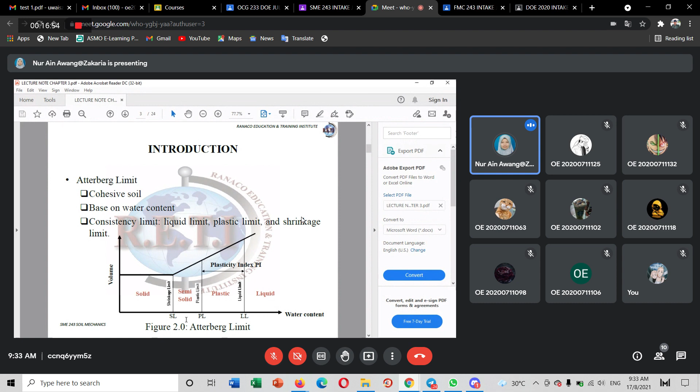So, it along with the plastic limit provides a means of soil classification as well as determining properties. As long as we know the plastic limit we find, it's for classification of soil, which we use to know its properties.

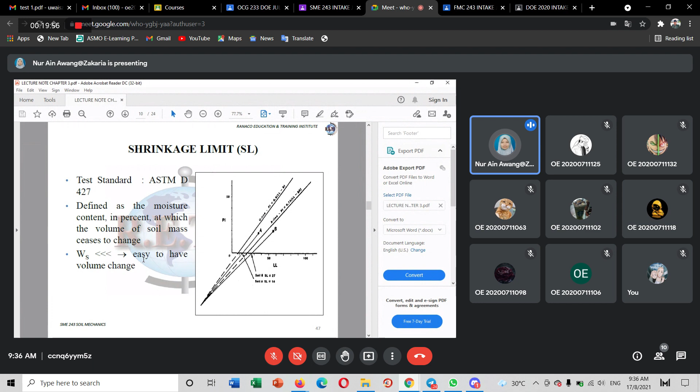Okay, salah kita. Next.

Consistency relation. Daripada tadi kita cari SL, PL, LL. So sekarang kita boleh tahu plasticity index, PI equal to LL minus PL. Dan tadi dah jumpa kan? Untuk cari liquidity index pula, LI equal to water content minus PL divided by LL minus PL.

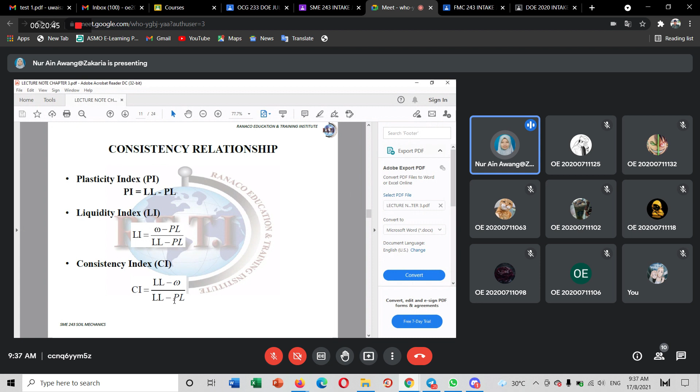Okay, ni adalah relation lagi, consistency relation lagi, yang mana kita describe pasal activity A. Activity A ni kita call sebagai satu benda yang kita nak tengok relationship dia. Kalau tengok pada sini, the value ni adalah value of A, less than 0.75.

0.75 maksudnya kalau macam sini kan, ni aktiviti 0.5, 1.0, 2.0, dia adalah non-active clay. Kalau activity A in between 0.75 to 1.25, dia adalah normal clay. A greater than 1.25, dia adalah active clay.

Nanti kita akan describe lah, kalau contoh dia duduk kat sini, macam mana? Dia di bawah 0.5, maksudnya kawasan dia adalah 0.5, less than, so dia non-active clay. Kalau dia in between 0.75 sini, 1.25 sikit, dia adalah normal clay. Kalau dia lagi besar daripada 1.25, maksudnya besar kawasan sini, dia adalah active clay. Tapi nanti saya akan bila tak ada dia pun, insyaAllah.

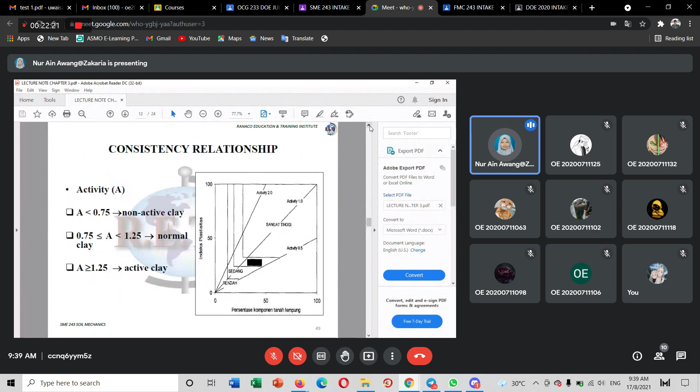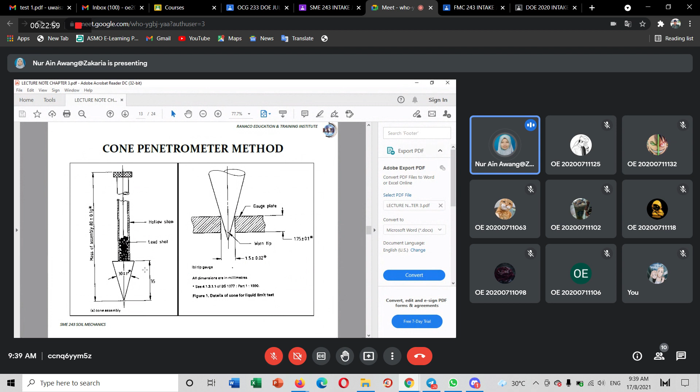Dia ada panjang macam ni, lepas tu dia ada cone macam ni, lepas tu dia ada hollow stem, dia ada lead shot, and then dia akan saya tunjuk awak. Ini method dia, penetration method. Kita akan go through how dia punya preparation.

Okay, so untuk sample preparation, kita first, kalau any coarse particle present need to be removed. Kita ambil soil, kita ambil sampel. Tapi untuk yang kasar-kasar, biji yang besar-besar, soil kita buang, by hand ataupun kita guna wet sieving. Kita buang dengan tangan ataupun kita sievingkan kasar-kasar lah.

Apa maksud coarse particle ni? Yang mana dia adalah yang retain dekat 425 micron sieve. Maksudnya kalau yang melepas ni kita ambil, yang tinggal itulah coarse particle. Faham tak? Okay, kalau kita sieving dia kan.

Okay, untuk next, preparation sample is quite big. Kita ambil yang kita dah sieve tu, yang lepas pada 425 micron sieve tu, kita ambil timbang dapatkan dalam 200 gram. Then the sample is transferred to a flat glass plate. Sample yang 200 gram tu kita transfer pada glass plate.

Okay, mesti awak tak nampak sebab tak pernah buat, tapi tak apa, nanti saya share video. Distilled water is added and the soil and water are mixed thoroughly.

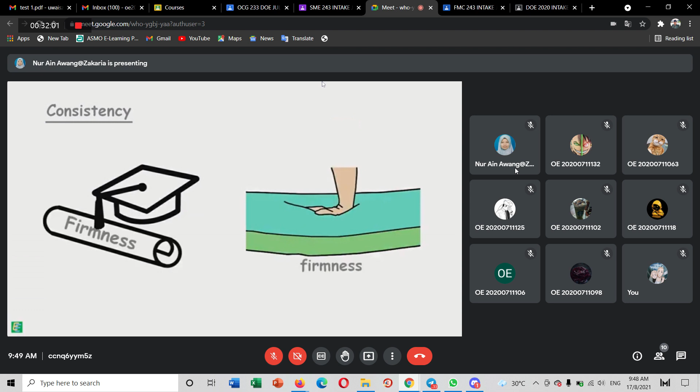We have learned that consistency is a term which is used to describe the degree of firmness of soil, and consistency limits are water content of soil at which the soil changes from one state to other. Those different states of soil are liquid state, plastic state, semi-solid state, and solid state. And consistency limits are liquid limit, plastic limit, and shrinkage limit.

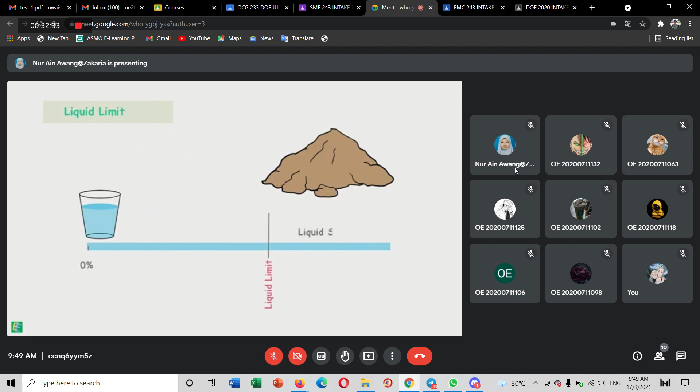We learned liquid limit as the water content of the soil at which it changes its state from being liquid to plastic and stops flowing like a liquid. At that point, shearing strength of the soil is the smallest value that can be measured in the laboratory.

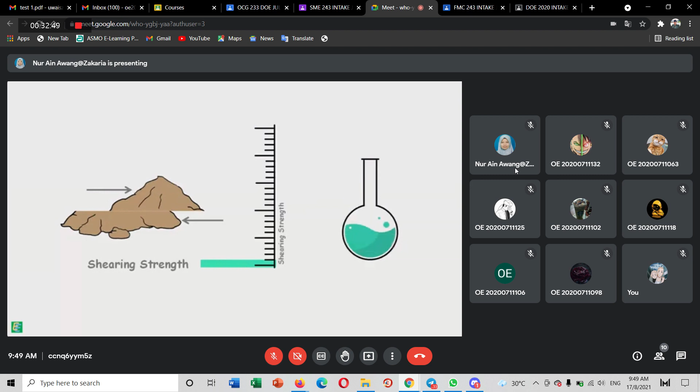The liquid limit of the soil depends upon the clay minerals present in it. Some clay minerals have larger surface area, and clay particles have negatively charged surface. So greater the surface area, stronger the surface charge, and greater will be the amount of adsorbed water. Therefore, higher will be the liquid limit.

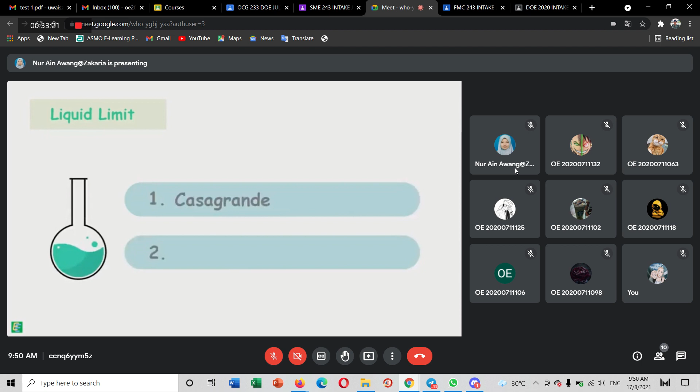We can determine liquid limit by two laboratory methods: Casagrande method and cone penetration method. We have already discussed the Casagrande method, and in this video we will discuss the cone penetration method.

In this method, we make use of an apparatus named cone penetrometer. It consists of a stainless steel cone which has its apex angle of 30 degrees. This cone has a length of 35 mm. It is attached to the base of a steel plunger rod. Weight of this assembly is 80 grams.

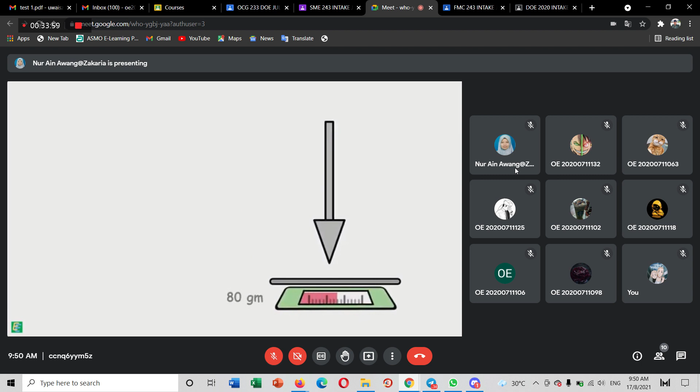This arrangement can slide vertically on pressing a push button, and is fixed to a stand with a base by a clamping screw. There is also a graduated scale attached to the instrument to take the readings of the amount of cone penetration.

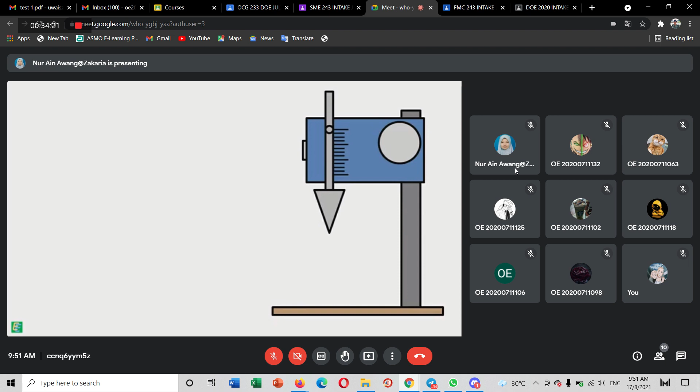In this test, the liquid limit is correlated to the penetration of a freely falling calibrated cone into the wet soil mass.

The soil sample is prepared in the similar manner as we did for the Casagrande method. The soil sample to be used for the test is air dried, pulverized, and passed through 425 micron IS sieve, because Atterberg limits are only significant for fine grained soils.

The 425 micron IS sieve has mesh openings of 425 micron or 0.425 mm. The particles we get after sieving are all of size less than 0.425 mm. These particles include fine sand, silts, and clays.

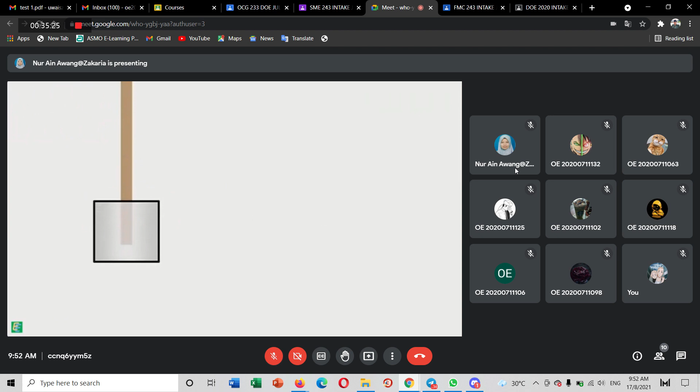We take about 150 grams of this sieved soil in an evaporating dish and thoroughly mix distilled water to form a uniform paste. Enough soil is placed in the brass cup of 50 mm internal diameter and 50 mm height. We need to ensure no air is entrapped in the cup.

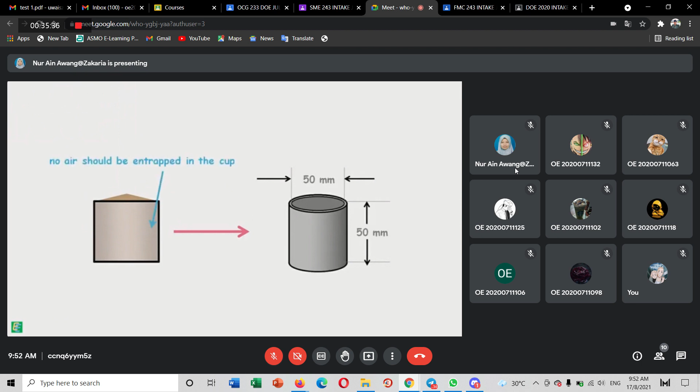The surface of the soil is leveled and the cup is placed below the cone. The cone is gradually lowered so as to just touch the surface of the soil in the cup. On the graduated scale, the reading is noted as the initial reading.

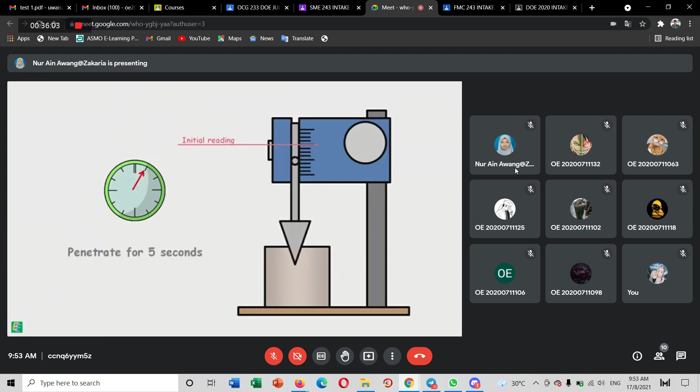Then we start the timer and the push button is pressed to release the cone. The cone is allowed to penetrate the soil for 5 seconds. After 5 seconds, the reading on the graduated scale is noted down as the final reading.

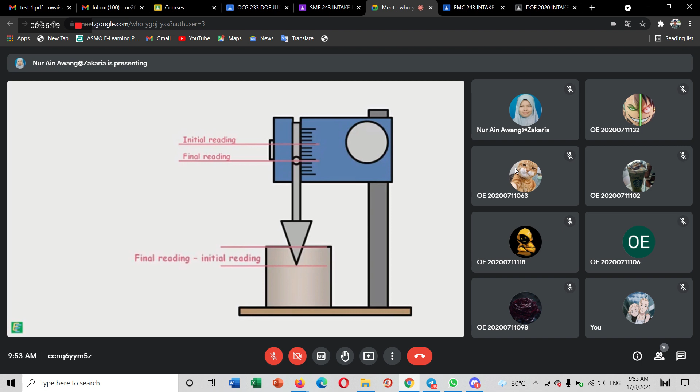The depth up to which the cone has penetrated the soil sample can be known by the difference of the initial and final reading of the scale. The penetration is noted down to the nearest millimeter. Let's say this penetration is P1 mm.

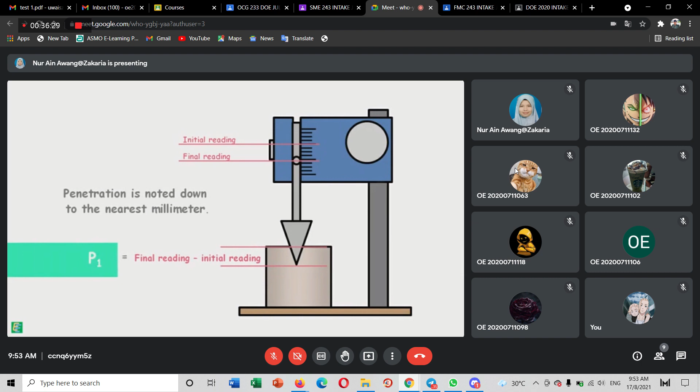Some amount of soil is taken from the top of the cup and its water content is determined using any of the water content determination methods. Say the determined water content is W1.

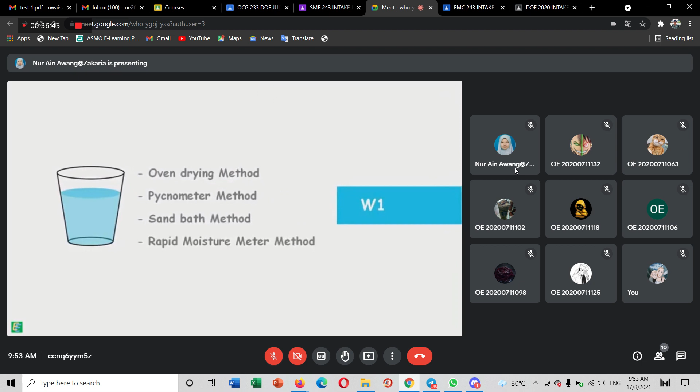Liquid limit of a particular soil is defined as the water content at which the cone penetrates the soil up to 20 mm in 5 seconds. But since it is difficult to have such a water content of soil which gets us exactly 20 mm of penetration in 5 seconds, we repeat the whole procedure at least 3 more times with different water contents.

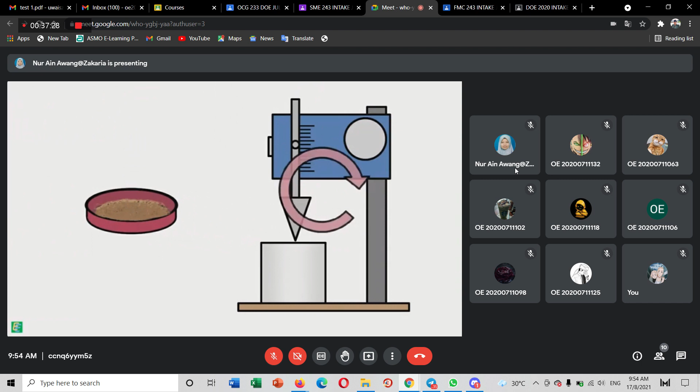The remaining soil in the cup is removed and mixed in the dish again. The cup and the cone are cleaned. Now we add more water to the soil and again make a uniform paste. Then we repeat the experiment and the values of penetration and their corresponding water contents are determined.

Soil with low water content would yield a lesser penetration value as the soil paste will be stiffer, and soil with high water content would yield a higher penetration value.

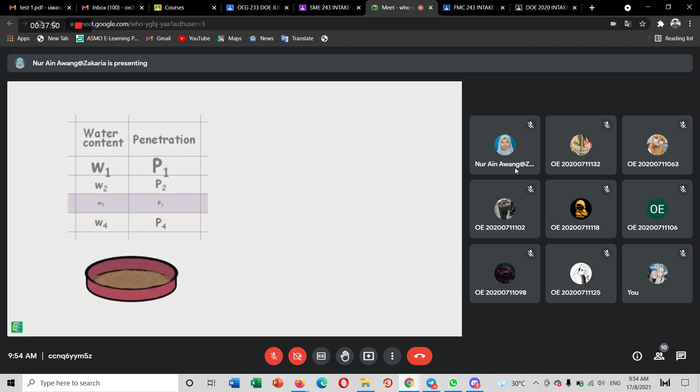Using these values, we plot a graph. Water content is plotted on a normal scale and penetration value is plotted on a log scale. A best fitting line is drawn through these experimental points.

Now from this graph, the water content value corresponding to 20 mm of cone penetration is read, and that value is taken as the liquid limit of that soil. The liquid limit is expressed to the nearest whole number.

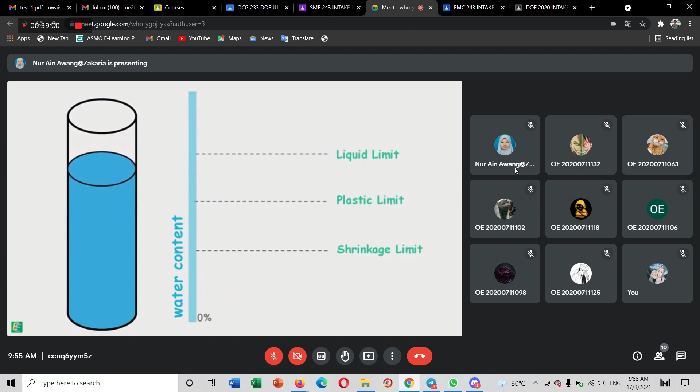When the water content of the soil falls below the liquid limit, the soil enters into the plastic state. We will study about the plastic state and plastic limit in our coming video.

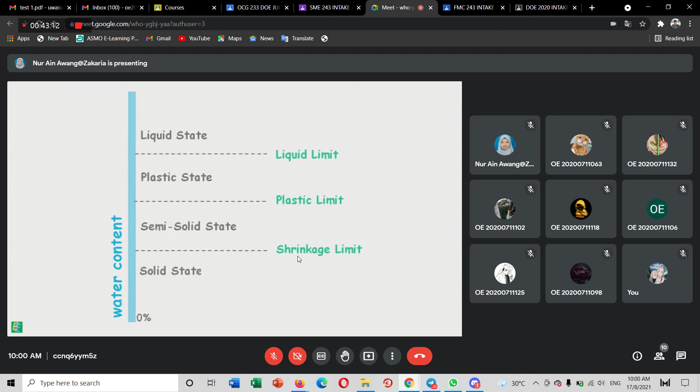We have learned that consistency is a term used to describe the degree of firmness of soil. Consistency limits are water contents of soil at which the soil changes from one state to another. Those different states of soil are liquid state, plastic state, semi-solid state, and solid state. Consistency limits are liquid limit, plastic limit, and shrinkage limit.

We have learned liquid limit as the water content of the soil at which it changes its state from being liquid to plastic and stops being liquid, and also stops flowing like a liquid. At that point, shearing strength of the soil is the smallest value that can be measured in the laboratory.

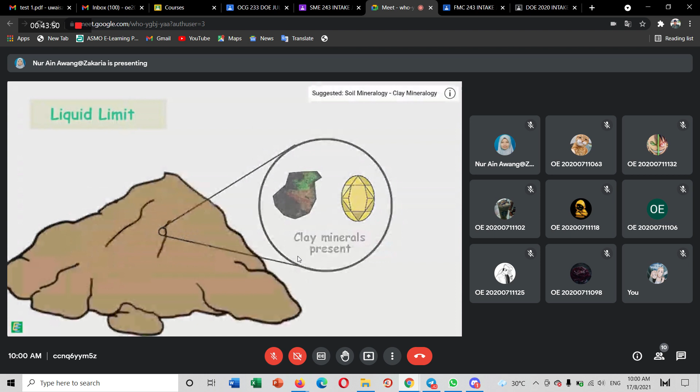The liquid limit of soil depends upon the clay minerals present in it. Some clay minerals have larger surface area, and clay particles have a negatively charged surface. So greater the surface area, stronger the surface charge, and greater will be the amount of adsorbed water. Therefore, higher will be the liquid limit.

We can determine the liquid limit by two laboratory methods: Casagrande method and cone penetration method. In this video, we will discuss Casagrande's method. For the determination of liquid limit by this method, we make use of an apparatus called Casagrande apparatus. It consists of a brass cup which is connected so that it is...

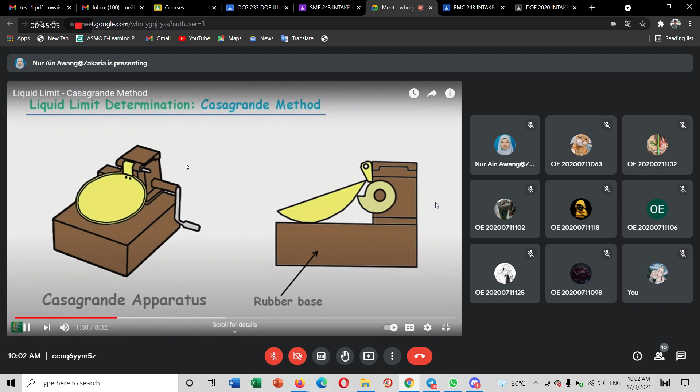...on the rubber base. The brass cup, when rotated by its handle, lifts to the height of 1 centimeter and drops freely on the rubber base.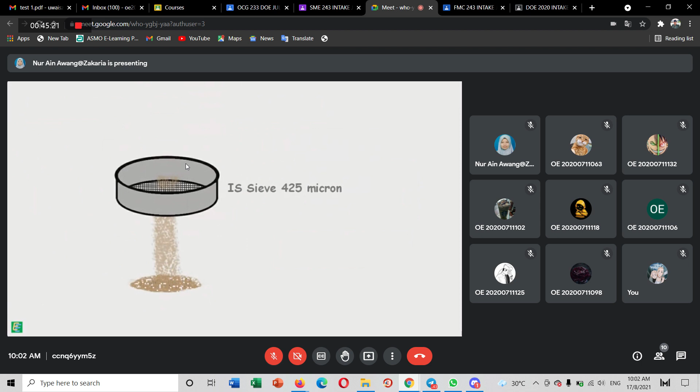To begin with, we take the soil sample and air dry it. Then we pass it through the 425 micron IS sieve to get the fine grained soils only, because we know Atterberg limits are only significant for the fine grained soils.

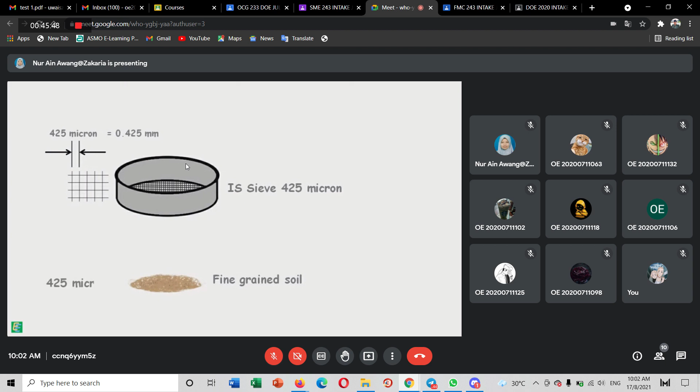425 micron IS sieve has its mesh openings of 425 micron, or 0.425 mm. The particles we get after the sieving are all of size less than 0.425 mm. These particles include fine sand, silts, and clays.

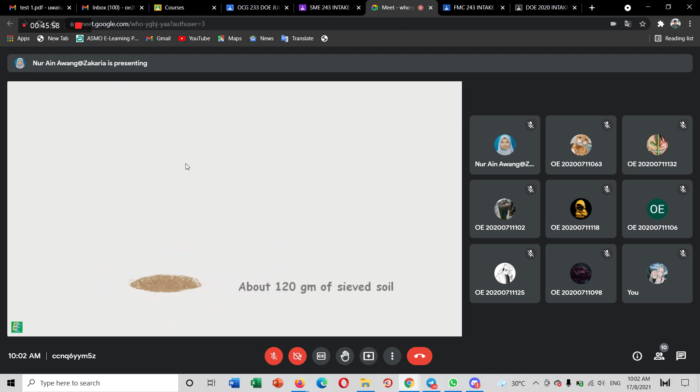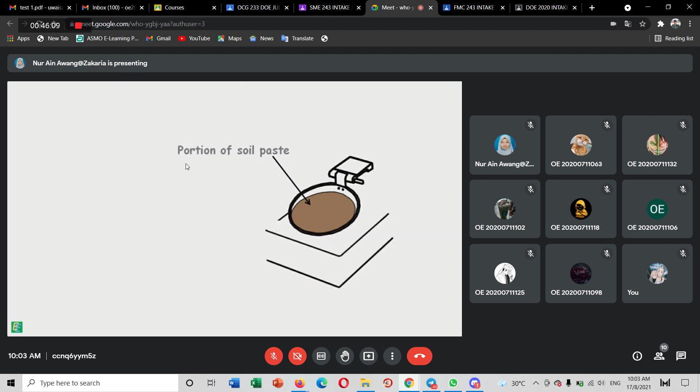Then we take about 120 grams of this sieved soil in a dish and mix it with distilled water to form a uniform soil paste. A portion of this soil paste is placed in the cup of Casagrande's apparatus and the surface is smoothed and leveled.

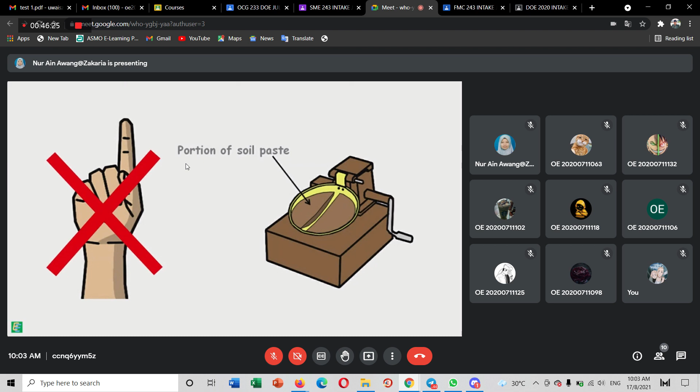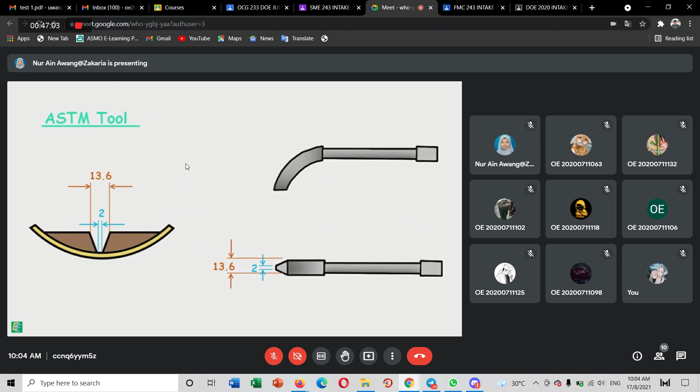This tool cuts a groove of width 2 mm at the bottom, 11 mm at the top, and 8 mm deep. The ASTM tool cuts a groove of width 2 mm at the bottom, 13.6 mm at the top, and 10 mm deep. The Casagrande tool is recommended for normal fine-grained soils.

After the soil pat has been cut, the handle of the apparatus is turned at the rate of 2 revolutions per second, which applies blows to the grooved soil pat, causing the two halves of the soil pat to come into contact. When the contact length of 12 mm is achieved, we stop turning the handle.

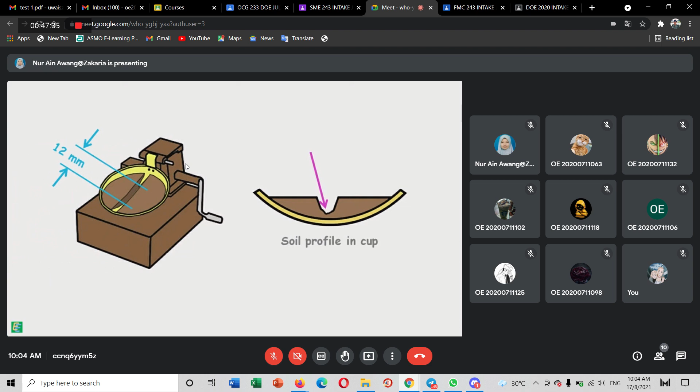We should take care that the groove closes by the flow of soil, not by slippage of it. If slippage occurs, then we should discard that soil pat and redo the whole procedure.

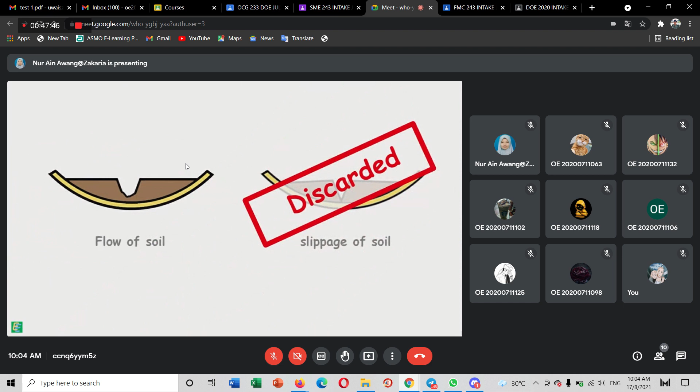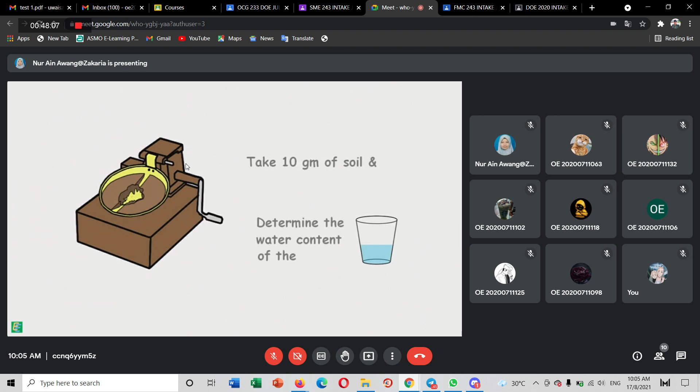The contact distance of the two soil halves is measured with a ruler. The number of blows required to close the groove for the length of 12 mm is noted as N1. About 10 grams of soil near the closed groove is taken for the water content determination, which is determined using any of the water content determination methods.

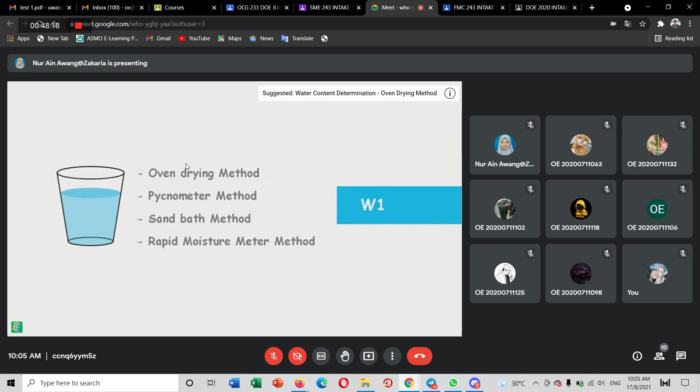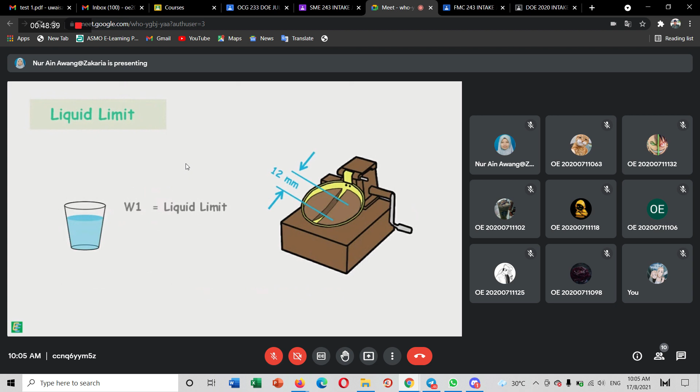Determined water content is noted as W1. The liquid limit has been defined as the water content of the soil at which the groove closes to 12 mm in 25 number of blows. That means our observation of water content W1 could be the liquid limit of our soil sample if the number of blows given to the soil sample N1 was 25.

But practically, it is difficult to get exactly 25 number of blows for the 12 mm groove closure. So we conduct the test for different water contents so as to get the number of blows in the range of 10 to 40. Hence, the experiment is repeated 3 more times after adding more water to the soil, each time recording the number of blows to close the groove for a distance of 12 mm and determining the corresponding water content.

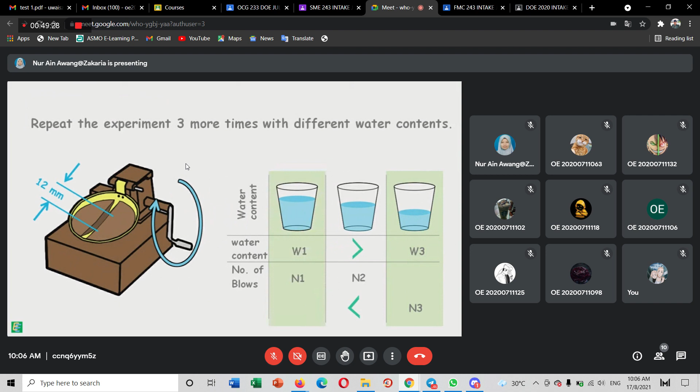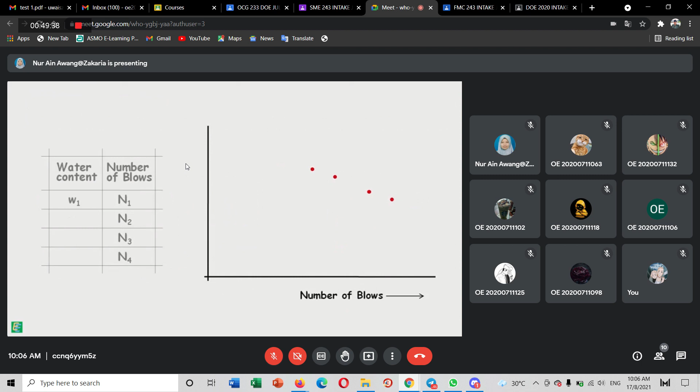Soil with low water content would yield more number of blows as the soil paste will be stiffer, and soil with higher water content would yield less number of blows. We plot a graph between these experimentally obtained values of number of blows and their corresponding water content. The number of blows are plotted on a log scale. A best fitting curve is drawn through the experimental points, and we will observe the graph will be approximately a straight line.

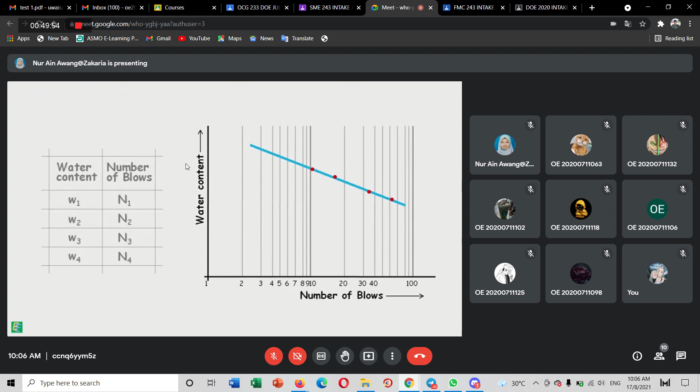This curve is known as the flow curve of soil. The water content corresponding to the 25 number of blows is read from the graph and is taken as the liquid limit. The liquid limit is expressed as the nearest whole number.

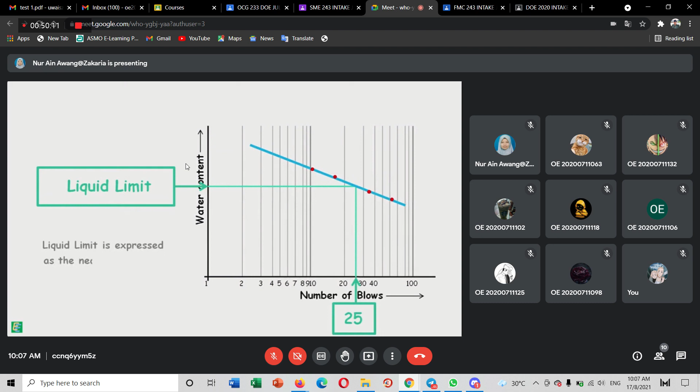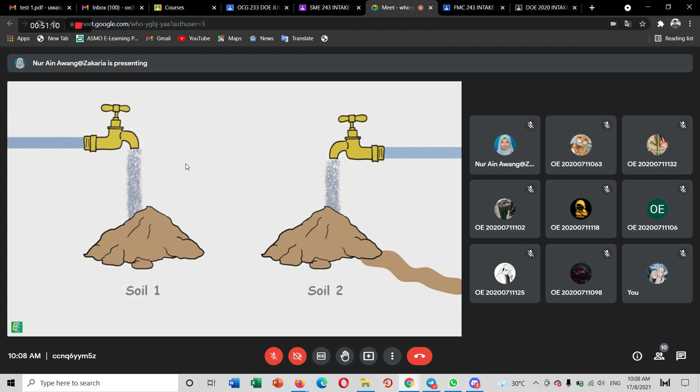Soil 2 will become and behave like a liquid at lower water content compared to soil 1. In other words, we can also say that if we keep on adding water to both the soils, soil 2 loses its shear strength and becomes liquid-like earlier, at lower water content than soil 1. Liquid limit of soil can also be determined by another method called the cone penetration method, which we will discuss in our next video.